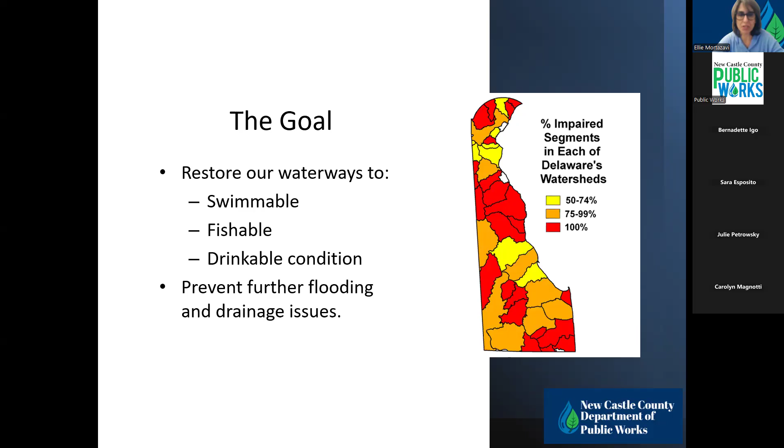As you can see in this picture, the majority of watersheds in the state of Delaware are impaired, some less, some more. And this is definitely our most important goal, to make sure that the red and orange colors become less intense, and hopefully someday they are all going to be in good white condition, as well as prevent further flooding and drainage issues. Not only is that our goal, but at the same time, we have our obligations under state regulations as well as the federal regulations.

New Castle County, we are a delegated agency by DNREC to administer Delaware sediment and stormwater regulations, such as reviewing the plans, construction plans, design plans, as well as the inspections and post-construction inspections for the stormwater management facilities. Also, at the same time, we are obligated under federal rule under the NPDES permit, the last one was issued to us back in 2013, that we are principal permittee with DelDOT, as well as 5 other co-permittees, which are Bellefonte, Elsmere, Newport, Delaware City, and New Castle.

So the NPDES program has 8 measures that we have to make sure that we implement, and we are trying to make sure that they are all effective. Public education, illicit discharge, stormwater during construction, which are all Department of Land Use, post-construction stormwater inspection and maintenance, which is why we are here today for this seminar. We also have good housekeeping for county facilities, as well as industrial stormwater, watershed priority list. We have to do different projects in different watersheds to improve the water quality, as well as mapping.

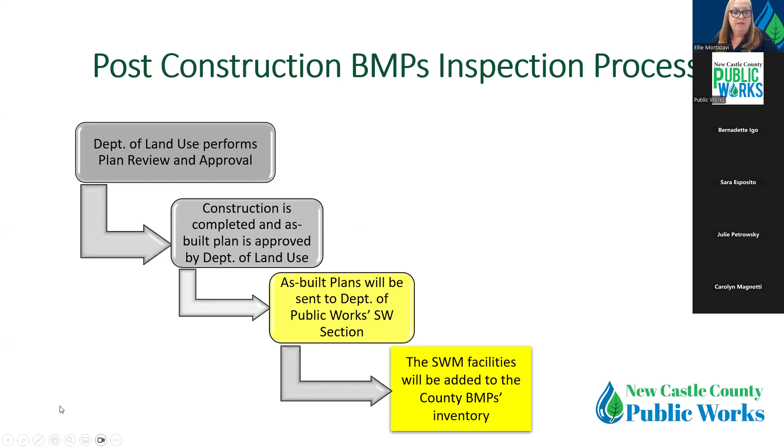So for our 2025 inventory, the total number of BMPs has been up to almost 3,000. We have 2,955. This is a mixture of private BMPs, such as 981 residential and 1,074 commercial industrial sites. Single-lot residential BMPs are exempt and not included in our inventory. All BMPs built pre-1991 are also not included in our inventory. On average, between 80 to 100 best management practices are added to our inventory every year. So we will definitely be over 3,000 facilities for 2026.

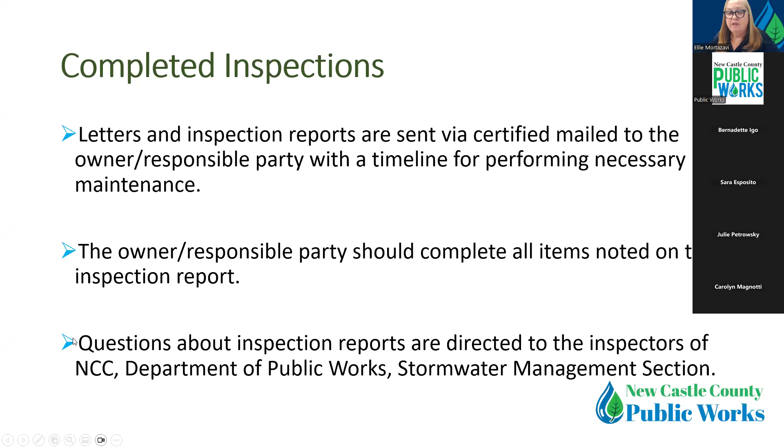So once the inspectors go out and complete the inspections, letters and inspection reports are sent by certified mail or email to the owner or the responsible party with a timeline for performing necessary maintenance. The owner or responsible party should complete all items noted on the inspection report. Questions about your specific inspection are directed to the inspectors in the Department of Public Works Stormwater Management. Julie will go over everything more specifically, but each inspection has the inspector's signature and contact information.

Once you receive the report, we highly suggest and recommend to obtain a copy of the operation and maintenance plan for the stormwater management facility at your site if available. We understand a lot of these facilities are older and sometimes we cannot find the plans, but we'll do our best for you. Also obtain an as-built plan as well as a landscaping plan. And then we recommend to hire a professional contractor who's familiar with this type of work.

Difficult BMPs for inspections, such as inlet inserts, urban sand filters, rain tanks, Stormtech, green roofs, are difficult to be thoroughly inspected by our inspectors because of limited access. Therefore, as the facility's owner, it's their responsibility to have the facility inspected and maintained in accordance with the plan, ensuring that it functions per design.

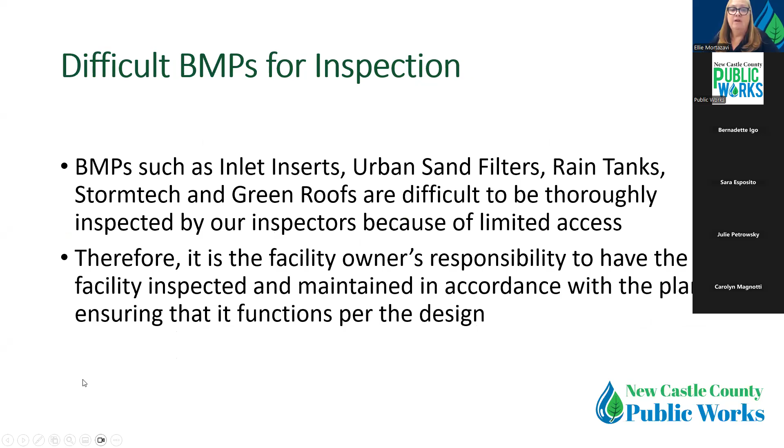We do have a contractors list. We can supply a list of contractors who have done work on similar stormwater facilities. We cannot recommend any specific contractor to you, but we would recommend obtaining 3 to 5 estimates, since they do vary in price and experience from the list we supply.

Oftentimes for sites that are older, we have major repairs that need to be done. An example of a comment for a major repair: the inspection report will notify you if major repairs are needed as directed. It will state something similar to this: repair, replace the deteriorated inlet/outlet pipe and flared end section. TV investigate the length of the inlet pipe to determine the extent of the deterioration. Submit the footage report to New Castle County for review prior to repairing the pipe.

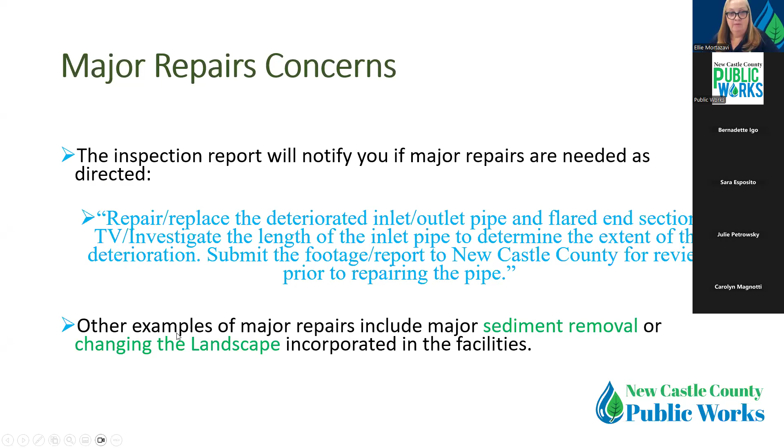Other examples of major repairs include major sediment removal or changing of any landscape incorporated in the facilities. Before performing any major repairs to the existing stormwater management facility at your site, please consult with the New Castle County Department of Public Works for the review and approval process. It must be approved before any work can start. Plans must be reviewed and approved by New Castle County Department of Public Works before you start the project with a hired professional contractor and/or outside engineer.

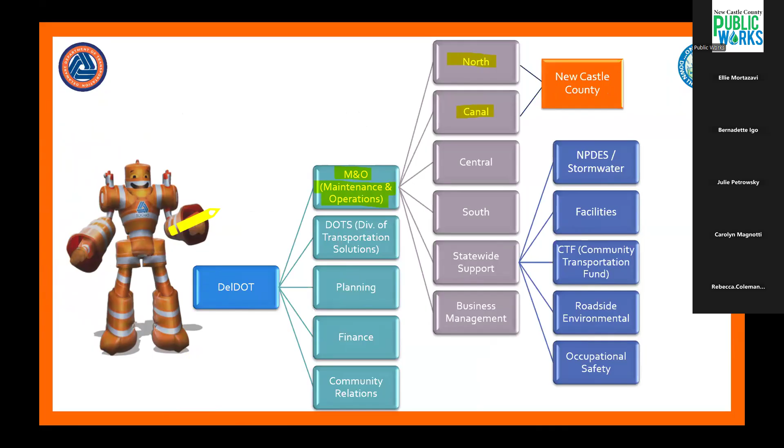So who you're gonna call? Wally, DelDOT's mascot, is gonna help me walk you through who to call within DelDOT. And again, I'm Sara Esposito, the program manager for the NPDES program. All right, so big chart. Wally's gonna walk us through it. Within DelDOT, we have a couple of different divisions. We're gonna start in our Maintenance and Operations division and talk about our North District and Canal District that help maintain New Castle County. There's two other districts, Central and South, that handle the southern part of the state, but we'll focus on North and Canal.

And then also part of M&O is our statewide support services section. Within that, we have the NPDES/Stormwater program, which is my program, as well as the Community Transportation Fund. We'll touch on those, as well as our business management section for the snow reimbursable program. And then we'll switch to other divisions, including our DOTS division, which is the Division of Transportation Solutions, and our Community Relations section.

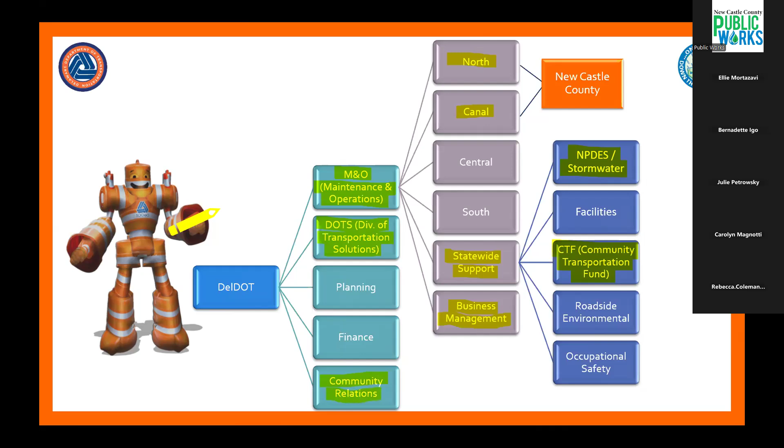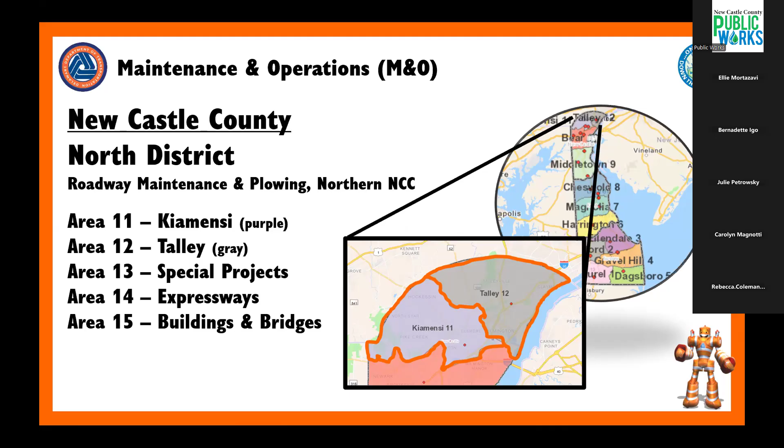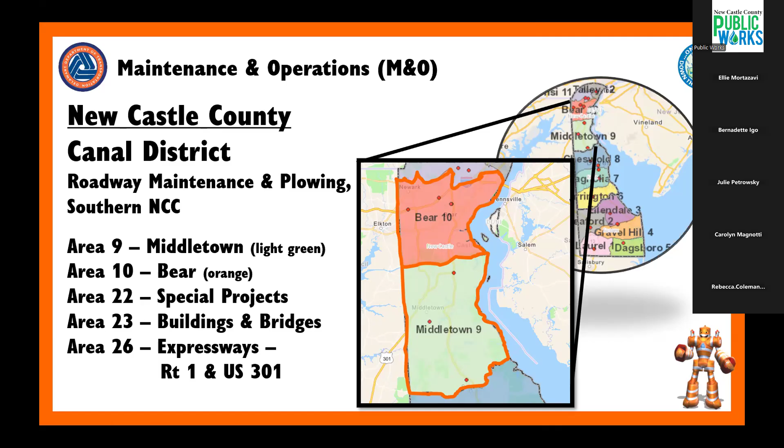All right, so Wally's going to give us our public service announcement number 1. The maintenance yards are not DMVs or permitting offices. I gave you the addresses and the phone numbers, but in actuality, there's really no need for you to visit these locations, or really to call them. And at the very end, I'll be giving you the best number to call to report a problem.

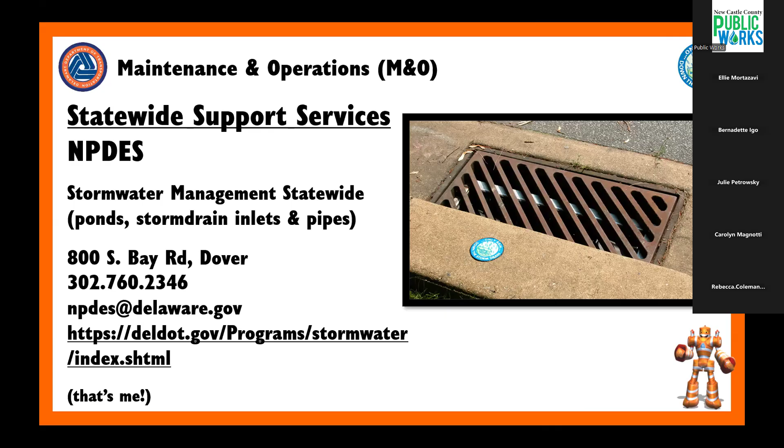Public service announcement number 3 from Wally. Not all storm drain infrastructure is DelDOT's. So DelDOT only maintains storm drain infrastructure that carries roadway runoff to the point of discharge to the end of the closed drainage system. We do not maintain infrastructure upstream of the road, such as backyard runoff that did not originate off another roadway. We do not maintain ditches or streams within subdivisions, as these are downstream of that closed drainage system. And we also do not maintain stormwater ponds within subdivisions, because again, that's at the end of the closed drainage system, and New Castle County helps oversee those, and you'll be getting a lot more information on that today.

Caveat to all that is, unless there's a specific agreement that states otherwise, we do have some shared ponds within subdivisions that treat both DelDOT water and the subdivision water. They're few and far between, but they do exist.

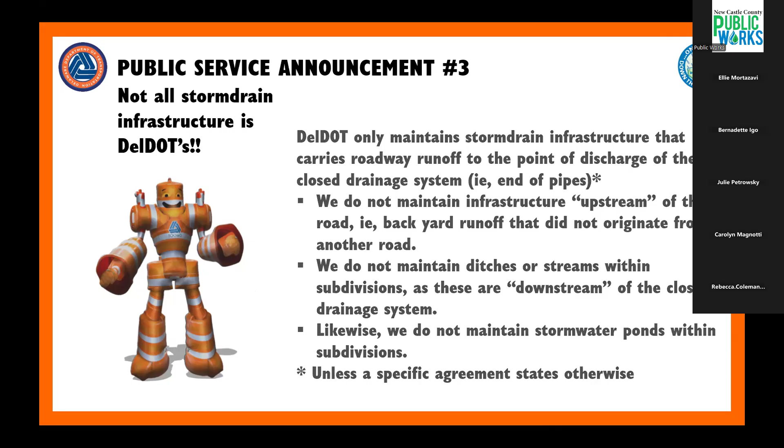So here's a map or a diagram to help explain some of that. If we're looking at this subdivision here, DelDOT maintains subdivision roads, so DelDOT would maintain the storm drain infrastructure that's in the roadway, Nathalie Drive, plus all the other roadways in the community. We would also maintain downstream of the roadway to the point of discharge, as long as that pipe is in a drainage easement and was part of the original subdivision design.

But we would not maintain the open ditch downstream of that discharge. And likewise, we would not maintain upstream of the roadway since those back lot areas do not carry any roadway runoff. And that's true even if that infrastructure was there at the time of the initial subdivision recordation, we would still not maintain that infrastructure because it does not have any roadway runoff associated with it.

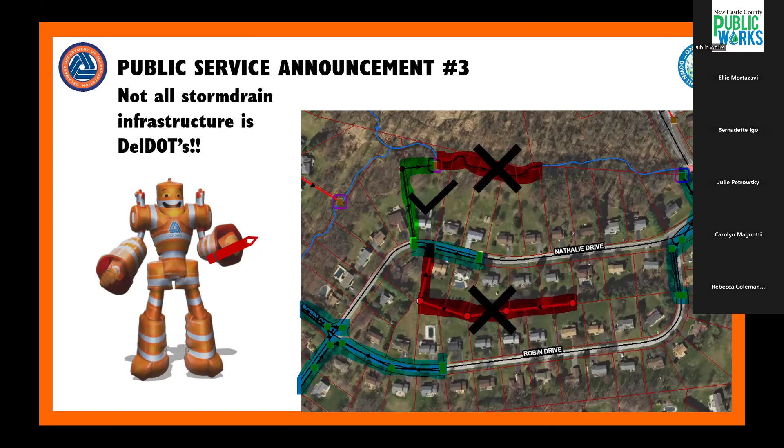All right, back at it. Sticking with the NPDES program, my program, we also help make sure that our water is clean. We check the end of our pipes regularly to make sure that there's no pollution. And then we also educate the public to not dump stuff down the storm drain. And if you see something, you can report it and we'll go out and investigate.

So we provide this hotline, 302-STOP-IT, and the website 302stopit.org in conjunction with New Castle County, so that if you see something, you have an avenue to report it and we'll go out and investigate. If it's not either us or the county's responsibility, we'll help figure out who's, like maybe it's a municipality's, and we'll coordinate with that municipality as well.

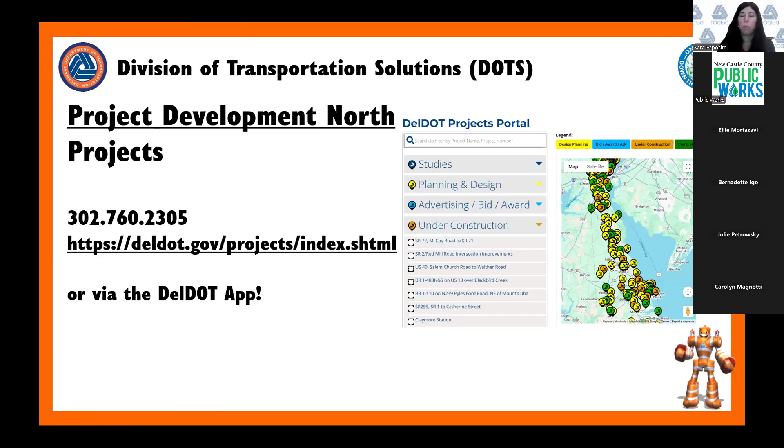So you can check out our DelDOT projects portal website that shows locations and color codes the projects based on whether they're in design or under construction or complete. And you can also do the same thing with the DelDOT app. The app that I showed earlier had an icon for projects and it would pull up a similar looking map. And you can click on one of those projects and bring up a project webpage that gives more information about the projects, including the plans.

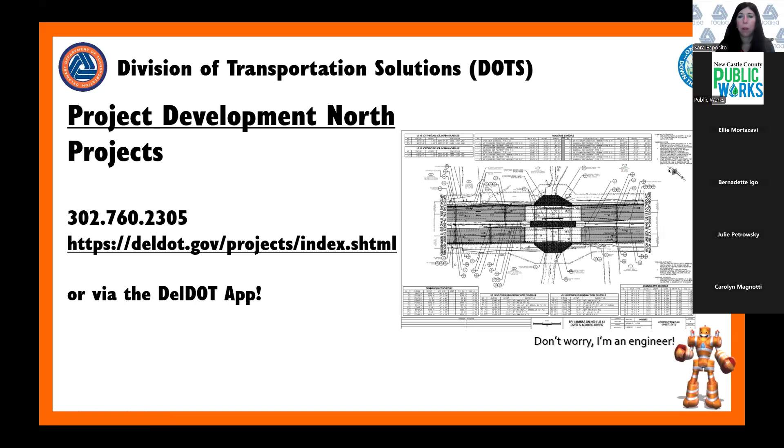And there's a lot of information on the plans. There's usually also public workshop information that shows it more conceptually, kind of toned down a little bit, so it's not quite as in-depth as these black and white engineered plans show.

That best number to call is our Transportation Management Center, or TMC. It's basically our dispatch 24/7 hotline that's staffed to receive any roadway issues and conditions, and dispatch that to the appropriate person or group to handle. So if you're going to store any phone number in your phone, I would recommend this: 302-659-4600, or #77 does the same thing. That sends you to that 24/7 hotline, and you can report a problem and they'll dispatch it.

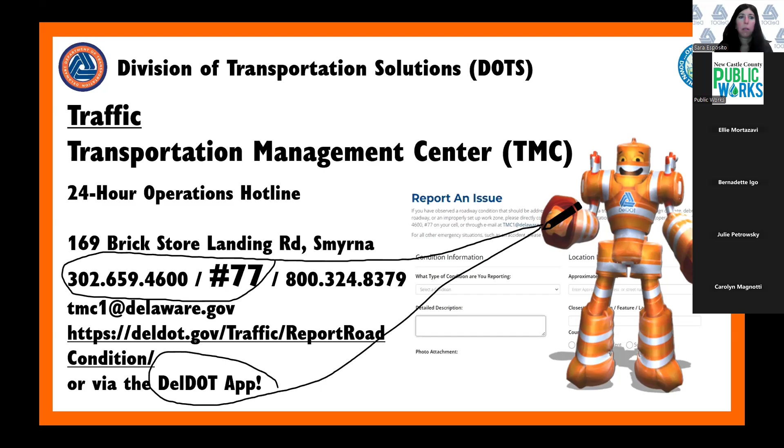So in summary, who are you going to call? TMC. And again, those phone numbers are there. And what are you going to use? The DelDOT app.

And then just real quick, wait, there's more. Just to put a couple plugs in for our Delaware Livable Lawns program that we in the county help sponsor. You can get a free soil test kit to test your soil and know whether you need fertilizer and the amount of fertilizer you might need. Or you can also find out about a certified Livable Lawns company that can come out and do the soil test for you, and then also provide your lawn maintenance needs.

So you can check out the Delaware Livable Lawns website to either go the DIY route and get your free soil test kit and use those recommendations to fertilize your lawn yourself, or you can find a certified commercial business that would handle that for you. And lots of literature on the website. Most of it boils down to doing that soil test in the spring and then fertilize based on those recommendations in the fall. Fall is really the best time to put fertilizer down.

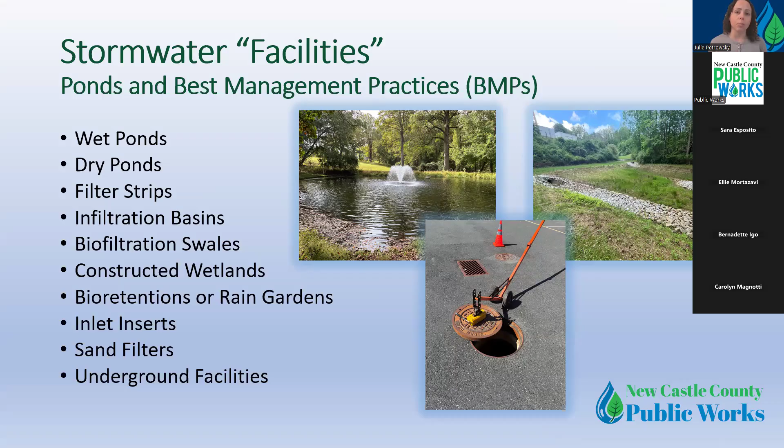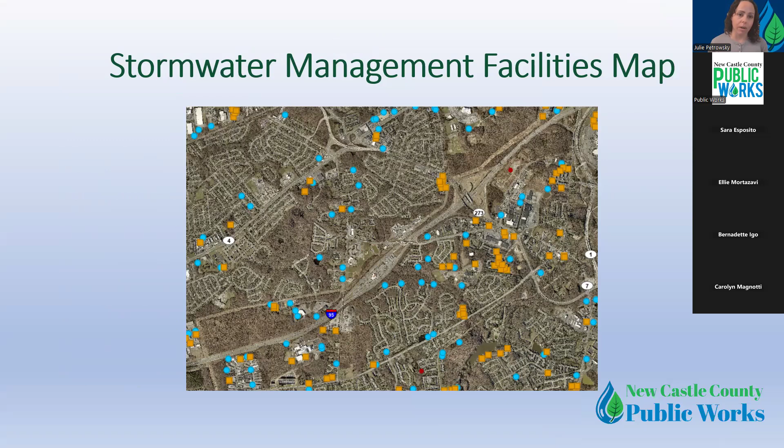Our stormwater management facilities are noted on our GIS map. Our facilities are grouped together by location, and each year our stormwater inspectors are assigned to inspect facilities within a certain group or area. If you ever have trouble locating the facilities at your site, please feel free to reach out to us, and we can email you a map screenshot showing where everything's located.

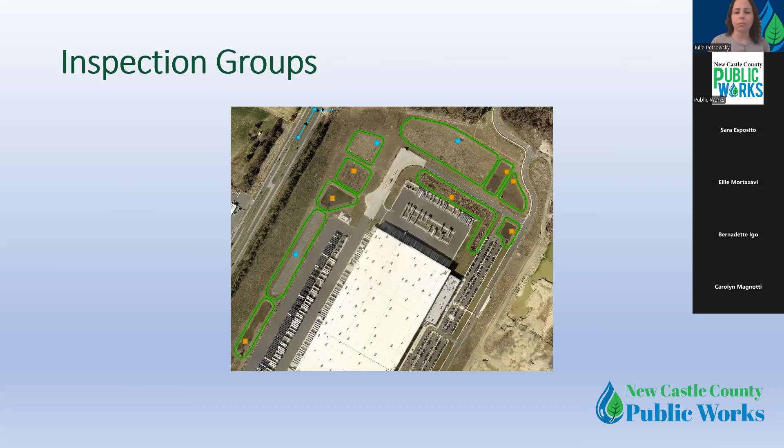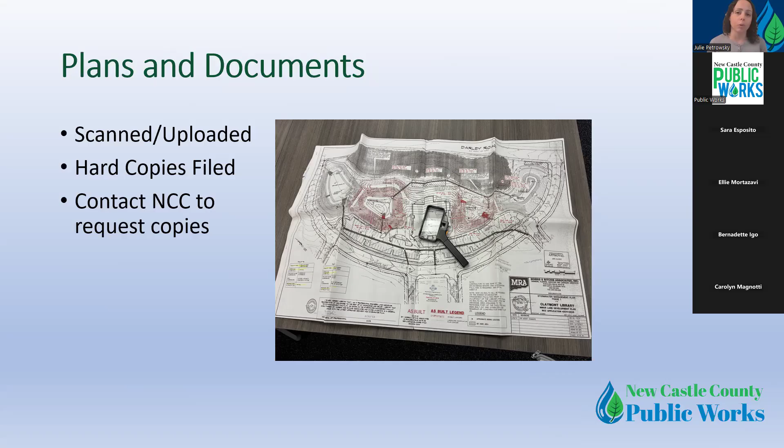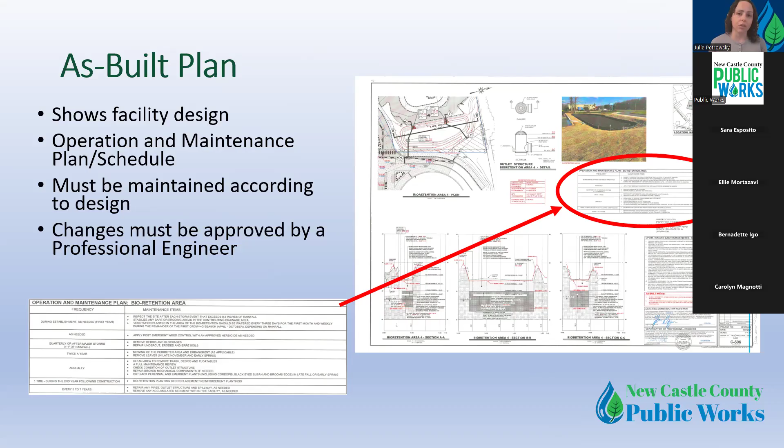The as-built plan shows the design details and gives instructions on how the facility should be maintained. There's usually a section on the as-built plan noted as the operation and maintenance plan that tells you what kind of maintenance should be performed and how often. Per New Castle County Code, all stormwater facilities must be maintained according to the plans, and you cannot make any changes or alterations to the facility because they're supposed to match the approved design plans. So if you want to make any changes at all, you would need to hire a professional engineer to red mark the existing as-built plan and then submit that to my office for review. If we do approve the red mark plan, then you would be permitted to proceed with those changes, but you must receive our approval first.

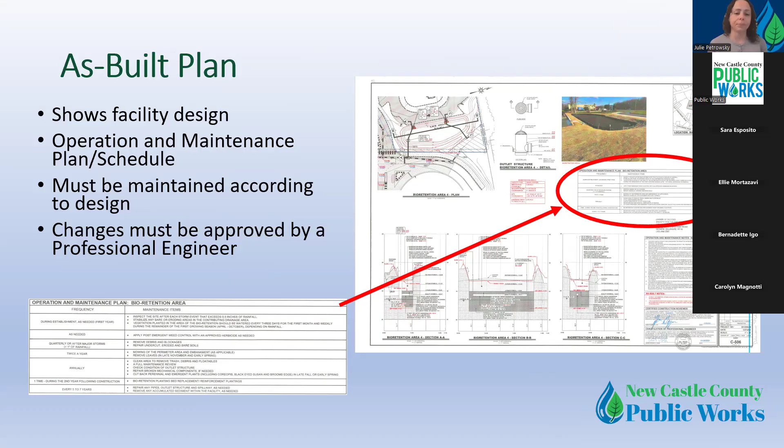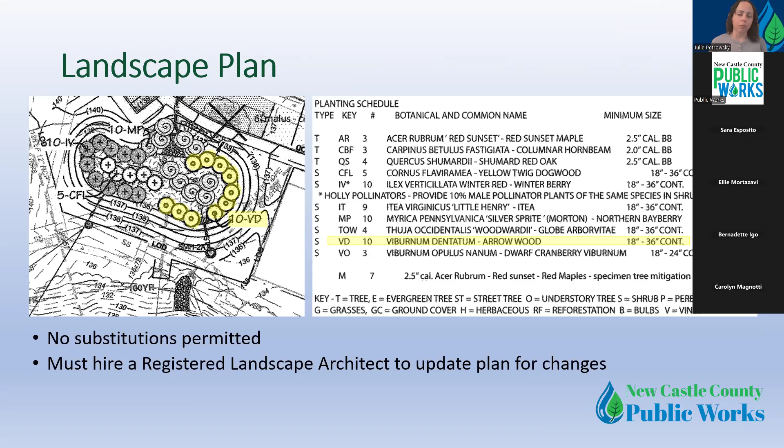And unfortunately, again, per New Castle County Code, all plantings must be installed as shown on the approved plan, so no substitutions or changes are permitted. If you do need to make any substitutions or changes, you would need to hire a registered landscape architect to red mark that landscape plan and submit that to my office for review and approval prior to making the changes.

We use a program called CityWorks for our asset management software. Through CityWorks, each facility in our inventory and each inspection report that's generated for the facilities are tracked. So each facility is assigned a unique 5-digit ID number. All ponds begin with the number 1 and all BMPs begin with the number 2.

We inspect all our stormwater facilities at least once per year, and we follow up by sending an annual inspection report based on that inspection to the site's owner. Sometimes we will send a courtesy copy to the site tenant if there's a different tenant versus owner, but ultimately the maintenance is the responsibility of the owner of the site. So if you have a maintenance agreement with a tenant or another party, it is up to the owner to make sure that everything's followed up on.

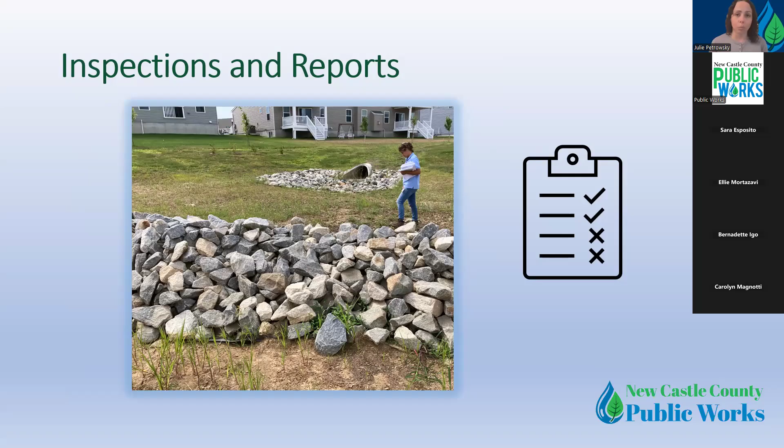Getting into our actual inspections. During our annual inspections, we go over our checklist and each line item that is noted on the inspection reports. The first thing we look for is access. There should be a 10-foot wide access path maintained to and around the facility and each structural component at all times. That way we can access everything, see what we need to see in order to complete thorough inspections.

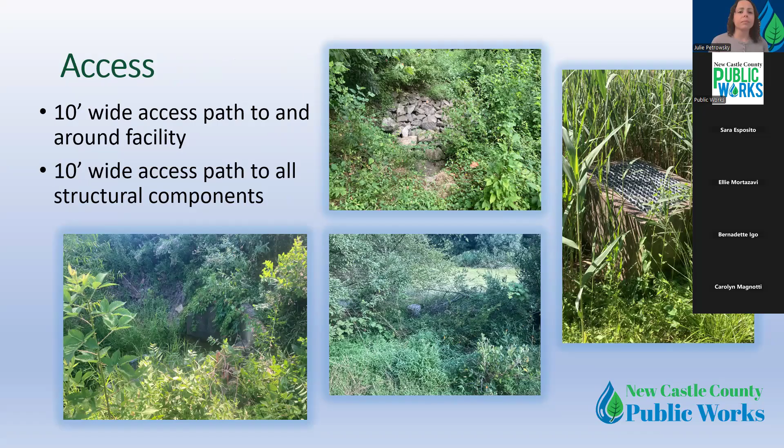We also assess the condition of each structure. We look for signs of rusting or corrosion, any cracks or spalling, or any evidence that the structures may be in failure. And we will recommend repair as necessary. If your facility does require repairs, please reach out to us ahead of time and submit those repair proposals to us to get our approval prior to completing the repairs, because we need to make sure that what you're proposing is acceptable by New Castle County standards and that it matches the approved design.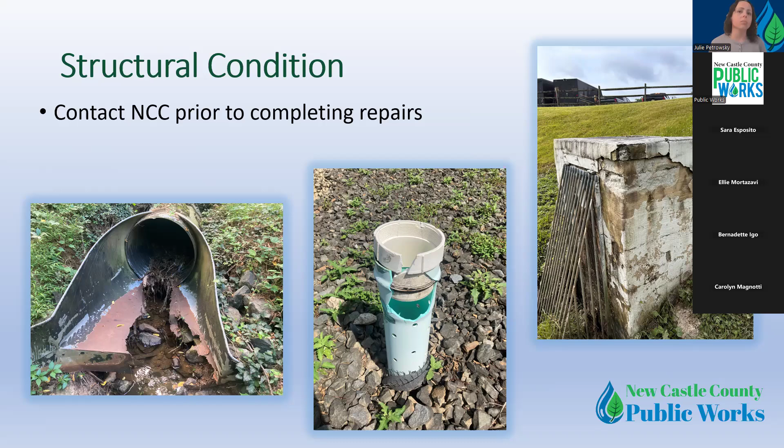We would really hate to tell you that the repairs are not acceptable and that you have to do it over. That is not a fun conversation for you or for us. So please be sure to reach out ahead of time and make sure that you get that approval from us prior to completing repairs.

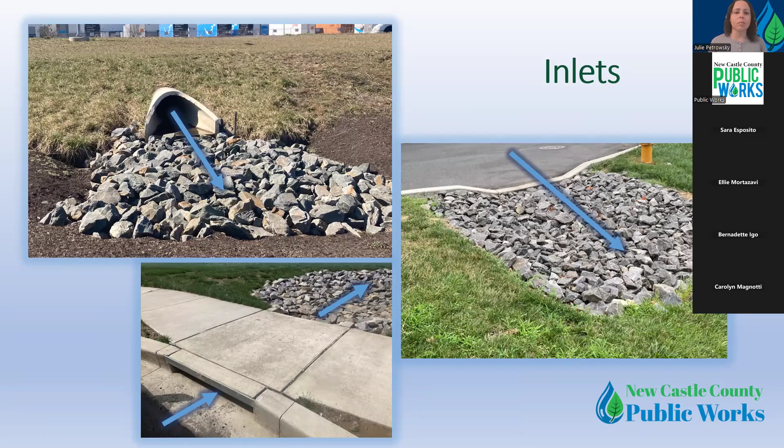The inlet structures are where water enters into the stormwater facility. They can be pipes or depressions or cuts in the curb. A lot of the time, there will be a riprap lined forebay or a rock lined apron area. That area is designed to collect sediment and debris as it washes in with the stormwater and to slow down the flow of water and prevent erosion. And those areas just need to be cleaned out during routine maintenance.

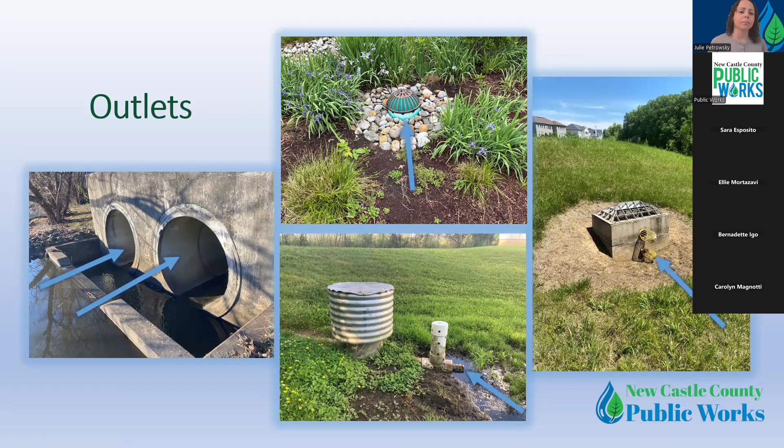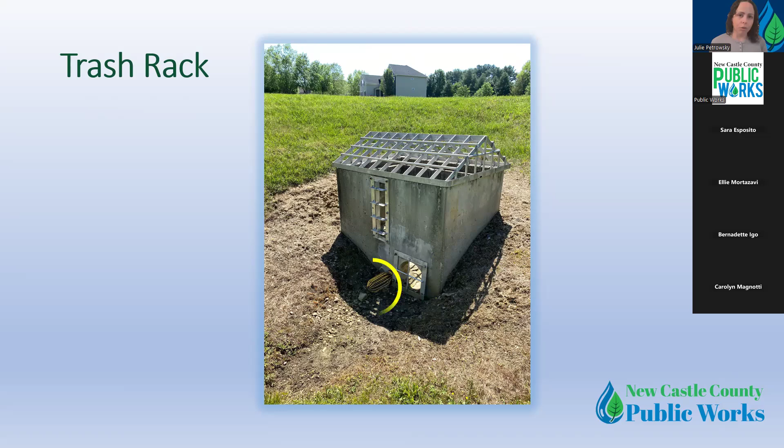The outlet is where the water exits out of the facility, so inlet in, outlet out. The outlet structure can be a variety of different types of pipes or risers. A lot of the time, there will be a trash rack on the outlet. The term trash rack refers to a device, usually a type of bar or grate, that's designed to prevent debris from washing into the structure. So you can see in this example, the outlet structure in this photo, there are quite a few trash racks on there. So when we note to remove the minor debris from the trash racks, this is what we're referring to.

The low flow structure is a device on or connecting to the outlet structure where the lowest level of stormwater flows out of the facility. It can be an orifice or an elbow fitting or a weir. These devices do need to be cleaned out on a routine basis. If the water level in your pond tends to be high for an extended period of time, then most likely the low flow is blocked, and you should have your contractor look into that to make sure they free that blockage. If the low flow does remain blocked for an extended period of time, that can put extra stress on the structure, and that can sometimes lead to structural failure. So this is an important item that you need to make sure your contractors are following up on.

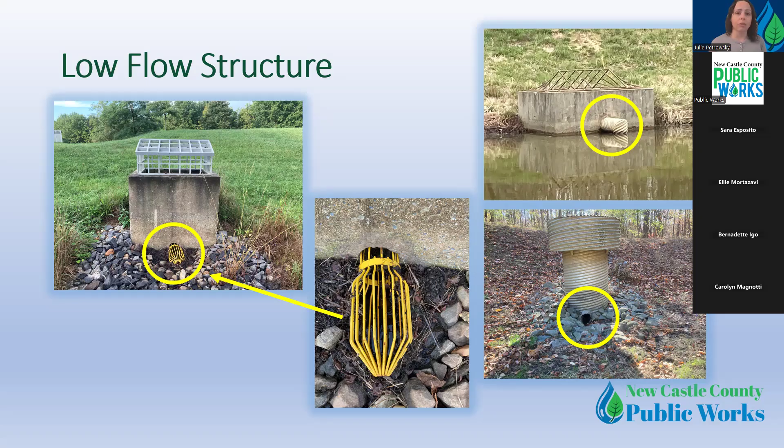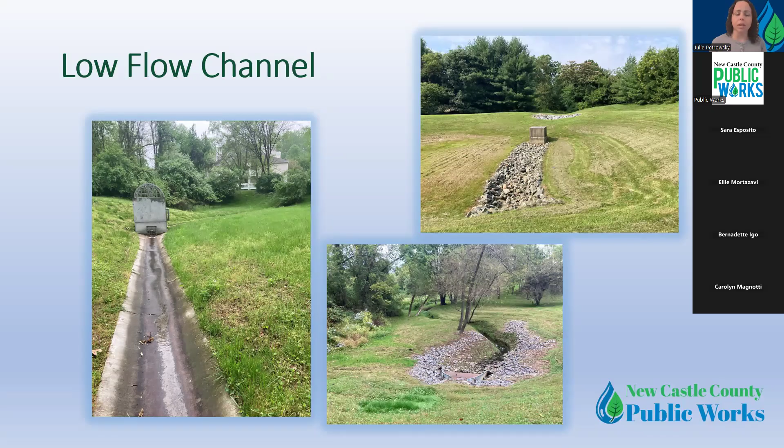The low flow channel, just as it sounds, is a channel that carries the lowest level of stormwater directly to the outlet structure. Low flow channels are usually lined with concrete or stone, but sometimes they can be more natural and grassed, like an inline pond, which resembles a small creek or stream. The low flow channels just need to have minor sediment, weeds, and debris removed from them on a regular basis to prevent blockages and encourage a positive flow.

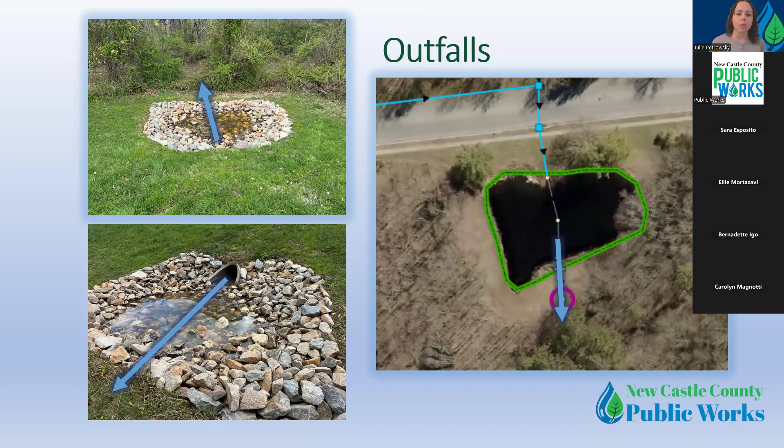The outfall structure: we mentioned that inlets carry water in and outlets are where the water exits out. The outfall is the final discharge point of the facility or the area in which your facility drains to. And like the other structures, these areas just need to have access maintained to them and have minor sediment, weeds, and debris removed from them on a regular basis.

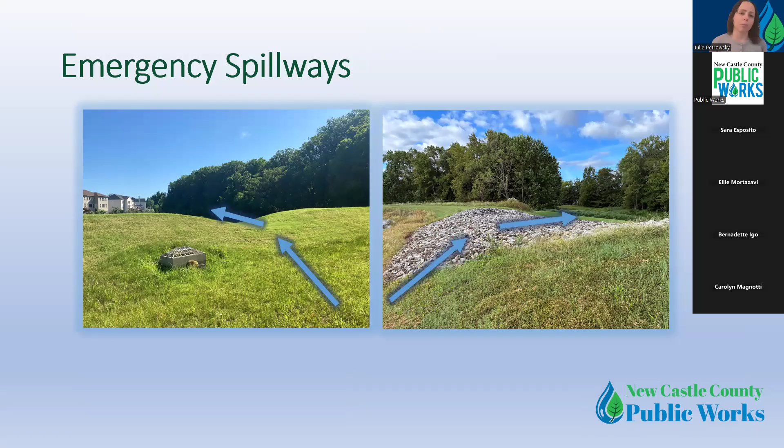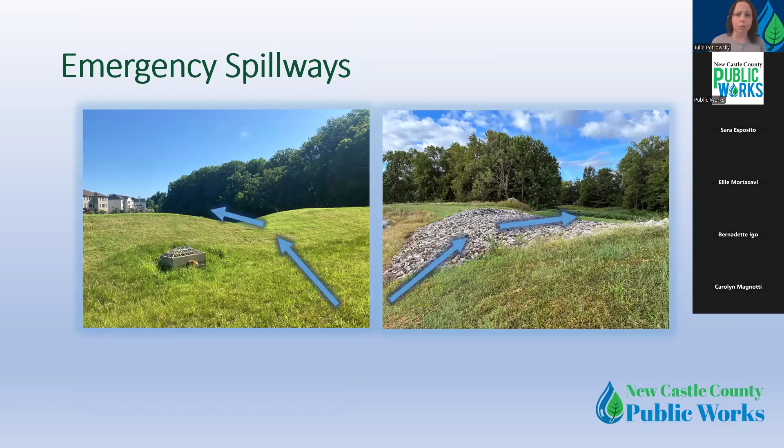An emergency spillway is a low area on the side slope of your facility. They're designed so that if we have a severe storm and your stormwater facility completely fills up and tops over the outlet structure, that excess stormwater will flow over through that low area. Sometimes they're lined with rocks or riprap, as you see in the photo on the right. Sometimes they're just grassed, as in the photo on the left. During our inspections, we will check for signs of erosion or bare areas, and we will note to remove minor sediment, weeds, and debris as necessary.

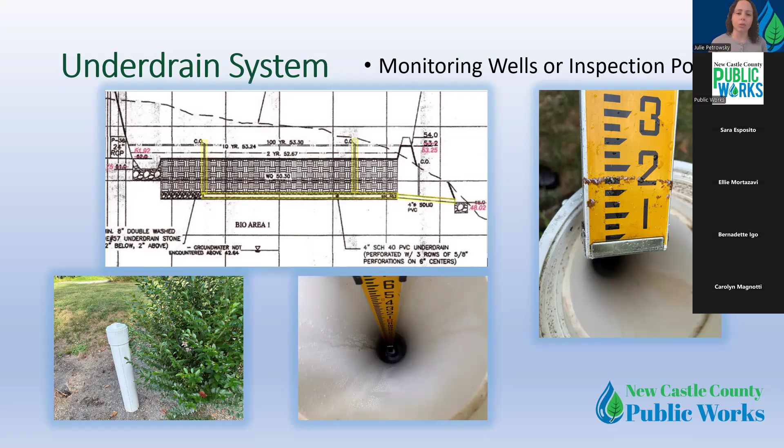If you have an underdrain system in your facility, there will be a small pipe that runs horizontally below the surface. These systems help to either infiltrate stormwater into the ground, or sometimes they will drain to an outfall area. There will be monitoring wells or inspection ports. That's the plastic stick-up pipes that we use to look into the underdrain system to make sure that it's functioning properly. So we will open the caps to those plastic pipes and look inside. Sometimes we will insert a measuring stick to determine if there's standing water or sediment building up inside. And if there is, then the facilities may need to be flushed or cleaned out at that time to eliminate any blockages.

Mowers, be careful. If you do have monitoring wells at your facility, especially if it's in a grassed area like within a bioswale, please make sure your mowers are aware of their locations and that they're careful to not crash into them and break them while mowing. Unfortunately, it's a problem that we see pretty often. If your mowers do break the monitoring wells at your site, the owner will be responsible to have them repaired or replaced. So please make sure you hire a competent contractor and provide them with copies of the approved plans so that they can see where these structures are located.

We look for signs of animal burrows. Any holes or burrows we will note to fill in and compact and remove any resulting sediment and stabilize the area. I know some animals can be persistent, and repairing the burrows can be a continuous battle. But it is an important part of maintenance to make sure that the facilities are in good condition and that they function as designed.

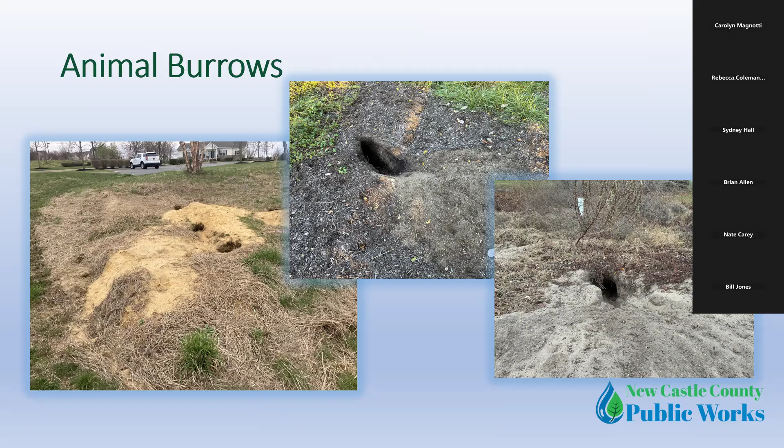We look for signs of erosion. Some erosion can simply be caused by stormwater runoff just running over the ground. Sometimes when we have a lot of rain, that can happen and it just needs to be repaired as it happens. Sometimes erosion can point to bigger issues such as structural failure, and we may need to look into that further and recommend repairs.

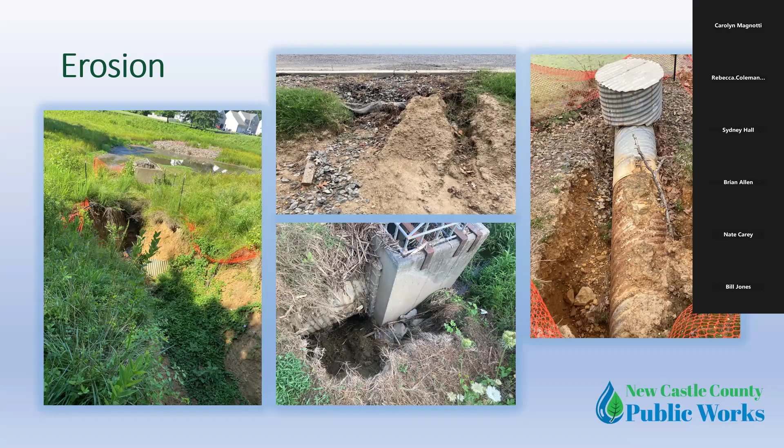I want to take a moment to emphasize that plastic netting is no longer permitted in the state of Delaware to be used for stabilization. It's a hazard to wildlife. Birds and snakes and other wildlife frequently get caught in it. And if you do have it used on your site, you will be required to have it removed and done over with the appropriate biodegradable matting. All contractors should be aware of this requirement, but unfortunately, we still see it being used a lot. So please make sure that your contractors are using the correct stuff.

One of the most common things that you'll see noted in your inspection reports is sediment removal. It's normal for sediment to wash into your stormwater facility with the stormwater runoff, and it just needs to be removed on a regular basis. So we will usually note remove the minor sediment, vegetation, and debris, because when there's one, there's usually the others, especially in these rock areas or these riprap lined forebay areas.

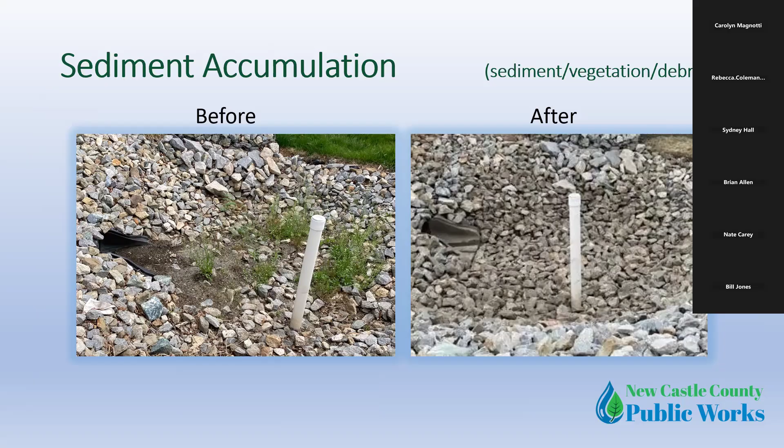So the photos in this example are an inlet structure and riprap lined forebay area before and after cleaning. The contractors will typically move the rocks, shovel out the sediment, weeds, and debris, and then replace the clean rocks back into the forebay area. So that after picture is the end result that we're looking for with the clean rocks. There are usually types of geotextile fabric underneath the rocks in forebays like this one. So your contractor will need to be careful not to damage that while performing maintenance.

We went over the landscape plan earlier in this presentation. We check the facilities with required vegetation, make sure that the vegetation is being maintained according to the plans, that all plants are in place, that the grass is being maintained at the correct height. So make sure your contractors have a copy of the landscape plan so they understand what needs to be done with the vegetation.

We also look for signs of unwanted vegetation, weeds or invasive vegetation, woody vegetation, young trees. These all need to be treated with an appropriate herbicide and then cut and removed from the site. This is something that should be kept up with on a routine basis. Weeds, especially invasive weeds, they can get out of control pretty easily. And when they become really dense, they can get pretty expensive to take care of. And it's really difficult to get them back under control again. So please make sure that your contractors are following up with the routine weed removal.

In Delaware, it is required to have a special license to apply aquatic herbicides. So if you see that noted in your report, make sure you hire a contractor who is able to take care of that. We do get a lot of questions about herbicides and how safe they are to use, how safe are they for the natural environment. But as long as they're used appropriately and according to the manufacturer's specifications, they are deemed as safe. So if you have any specific questions about the types of herbicides to use for the weeds you may be experiencing at your facility, I recommend that you reach out to a contractor who has their aquatic herbicide license.

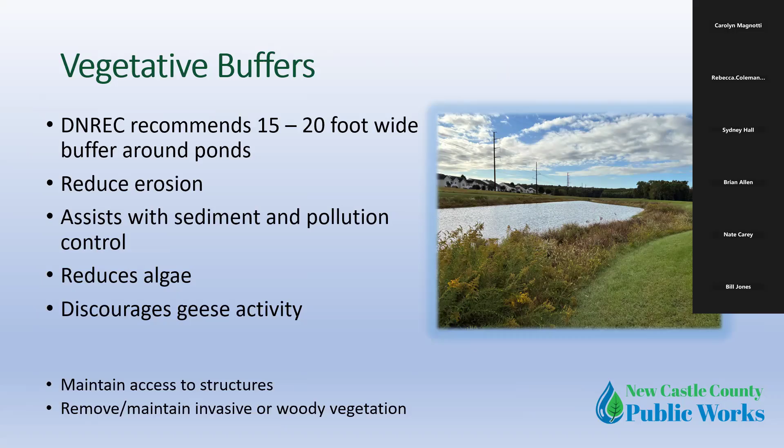Getting into the different types of stormwater facilities that you'll commonly see in New Castle County. Wet ponds or retention basins are ponds that have a permanent level of water in them at all times. The as-built plans for your facility will tell you what the normal level is for the water to be at. If the water level is too high or too low for an extended period of time, then most likely there's some type of blockage or a leak, something that we need to look into further. Make sure you're cleaning out the low flow structure on your outlet on a routine basis, and that will help keep the water level at the normal level.

Dry ponds or detention basins are basins that are designed to fill up with stormwater during the rain, and they release the water slowly. They should be completely drained within 48 hours after the rain has stopped. Again, make sure you're checking your low flow devices to make sure that the water can drain properly. It is fine to let the grass vegetation within these basins grow a little taller, as long as access is maintained to each structure in the facility, and as long as the facility is maintained to be free of invasive and woody vegetation.

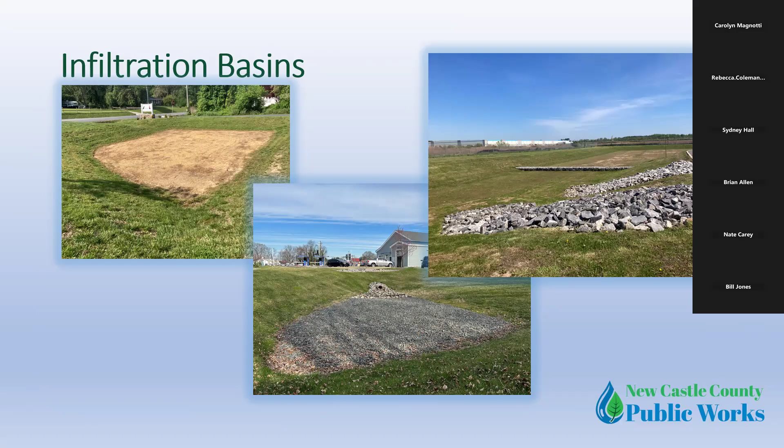Biofiltration swales are essentially drainage ditches that are lined with specific types of grass and herbaceous vegetation. Usually there will be height requirements within bioswales. It is important to let the grass or vegetation grow taller in these areas to slow down the flow of water and prevent erosion and also assist with infiltration. Specific height requirements will be noted on your approved landscape plan.

Please make sure your mowers and your hired contractors are aware of the height requirements and the boundaries of these stormwater management areas. A problem that we commonly see is that mowers will mow the surrounding areas short, and they want to keep going right through the stormwater management areas and mow them flush with everything else. So please make sure your mowers and contractors are aware of the boundaries of those areas. Some people will opt to install signs as a reminder, but ultimately it is up to the property owner to make sure that your hired contractors are following the rules with those areas.

Grass filter strips will usually have a height requirement, a lot like bioswales. They usually should be maintained at 6 inches or taller, but specific height requirements will be listed on your approved plans. Filter strips are designed as an initial treatment. They receive that first flush of stormwater that runs off of a paved surface. They're designed to slow down and spread out that flow of water. Sometimes there will be a stone level spreader or stone diaphragm that's designed to help trap sediment and debris as it washes off of the paved surface. And those areas just need to be cleaned out on a routine basis, just like with the forebay areas.

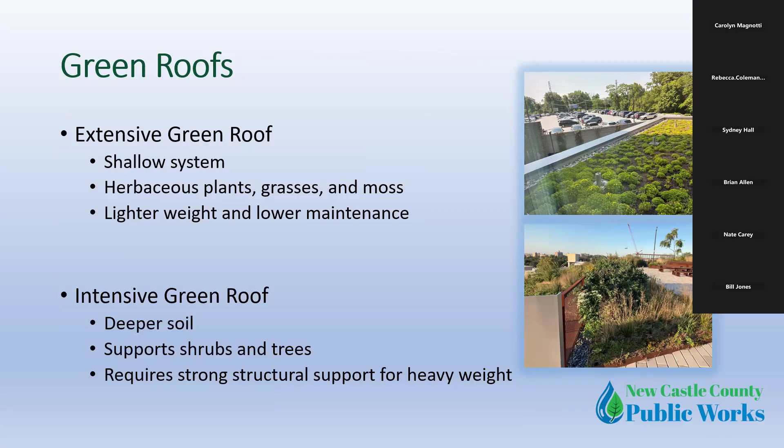Porous pavement and permeable pavers allow stormwater to drain through them instead of running off as with normal asphalt or pavement. There usually will be an inspection port that leads to an underdrain system. We will check those ports and the surface for sediment buildup during our inspections. We also check for signs of oil or petroleum products, any trash or debris, and general wear and tear of the surface. Specific maintenance instructions, including how to clean and how often, will be noted on the approved plans.

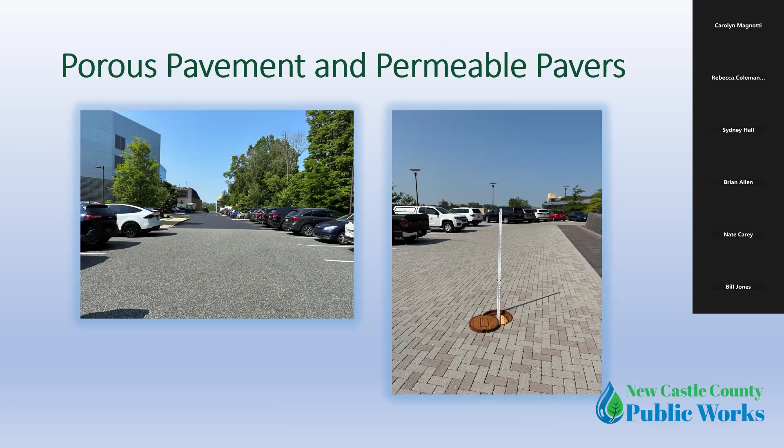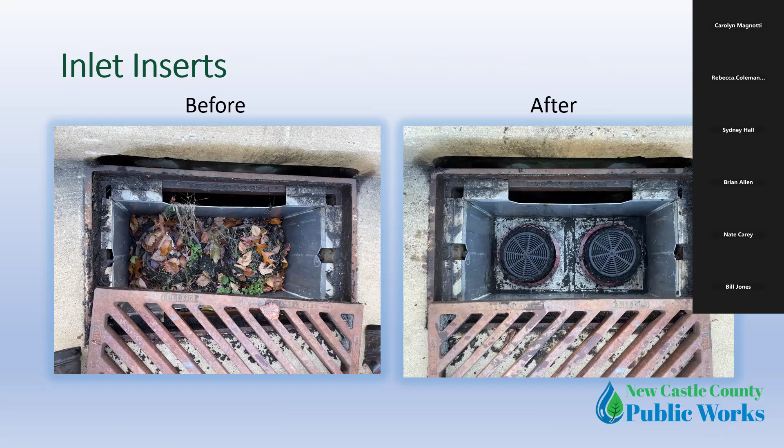Typical modular sand filters are usually found in parking lots. There will be two sides of chambers. Water chambers or wet chambers, that's the side with the slotted grates for water to flow into, and the sand chambers are the side with the solid grate. So water flows into the water chambers, fills up, and then flows through weir openings on the inside into the sand chambers. And water then filters through the sand and drains through a pipe installed along the bottom.

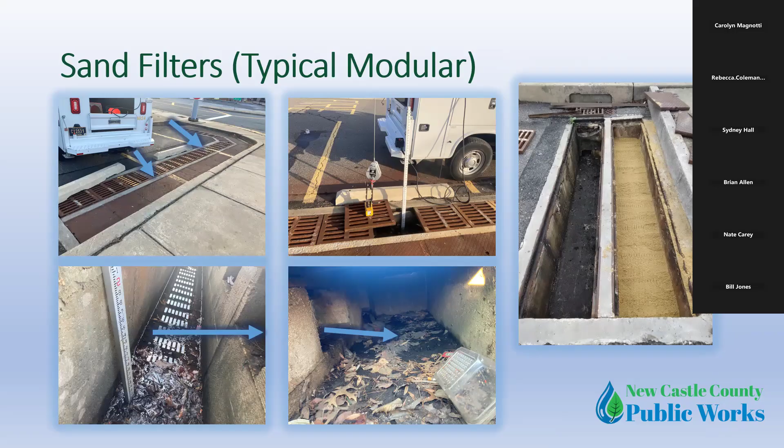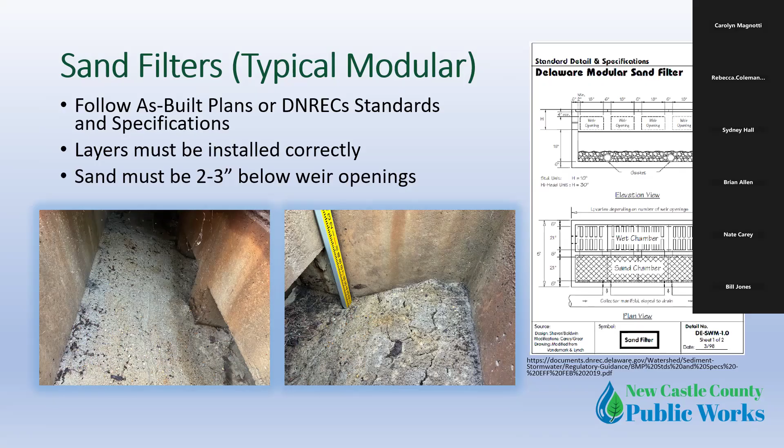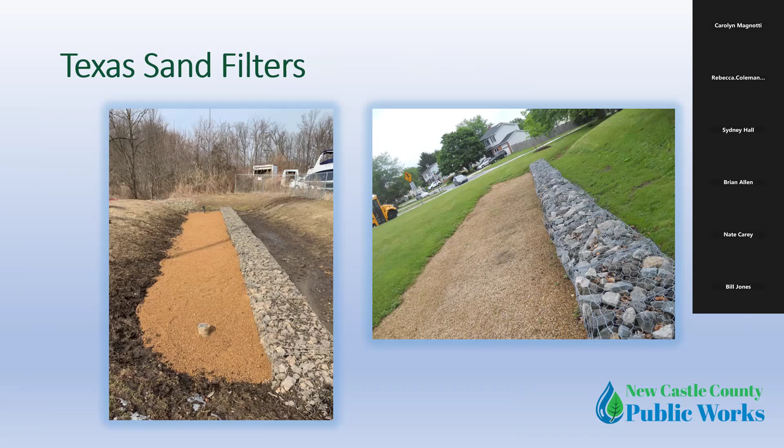Texas sand filters are above ground basins that will have sand or gravel media on one half, and there will be a grass or natural area on the other half, usually separated by a gabion wall or a rock dam. They function similar to the modular sand filters. They're just above the ground. Please refer to the approved plans for your site for specific maintenance instructions.

Underground facilities are a type of storage tank or chambers underneath of the ground. They're usually found in parking lots, but sometimes they can be in a grassed area as well. During our inspections, there will be manholes or inspection ports that we open to check for sediment buildup.

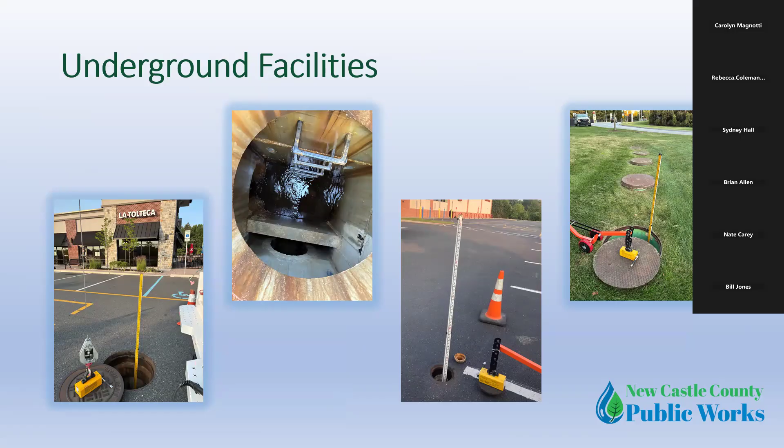Because of how these facilities are installed and designed, it's not possible for us to inspect every aspect of the facility during our annual inspections. Bernadette briefly touched on this during her presentation. Because of that, we do require for special inspection and maintenance logs to be submitted for these facilities, and Carolyn Magnotti will explain that more in depth during her portion of our presentation.

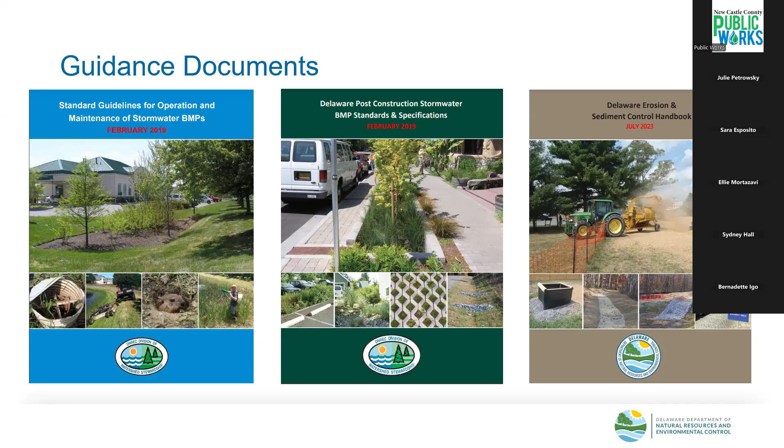Soil stabilization practices will often be required as part of BMP maintenance, so that is also discussed in the course. And participants are encouraged to explore the additional resources provided throughout the course. So what's exactly covered? We provide real examples of operation and maintenance plans used in Delaware with specific callouts for participants to understand what they may be looking for on site. The course highlights the importance of vegetation, covers how to review BMPs, and how to complete inspections.

So the course concentrates on more common best management practices, diving into the specifics for bioretention, sheet flow, bioswales, wet and dry ponds, infiltration practices, and underground systems. And for each BMP, the course covers a maintenance overview, criteria and frequency, and the checklist. A brief high-level overview is provided for BMPs on the right side of the screen that you will not encounter on site as often, such as vegetated roofs, rainwater harvesting, or constructed wetlands.

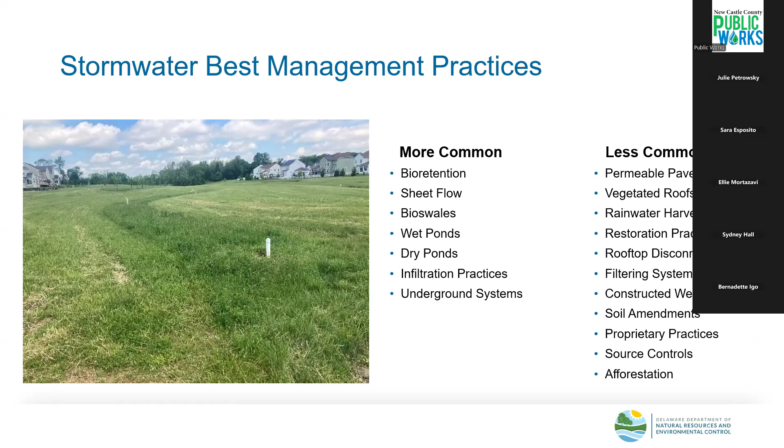Oftentimes, BMP maintenance is not a financial priority and doesn't occur annually as it should. The course offers two interactive scenarios for a routine maintenance example and a non-routine maintenance example. This course provides insight to different levels of BMP maintenance you might encounter on site and how to address the issues you'll find. So some BMPs you see will require plan submittals and full corrective action. The long-term goal of conducting annual maintenance is to avoid situations like these.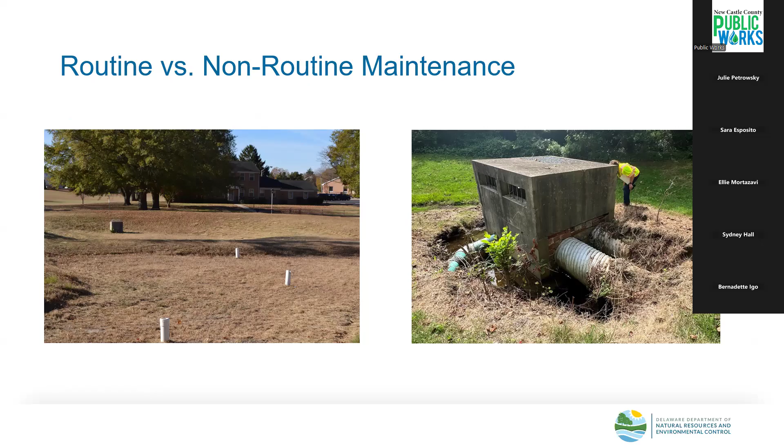So once you're in the course, you can access additional resources like I mentioned, including a job aid. The job aid is meant to provide on-site maintenance guidance for more common BMPs. So reminders to stabilize, manage vegetation, remove sedimentation, when to contact DNREC or delegate agency, and more. This is also available on our training and certification webpage in English, but we also offer it in Spanish within the Spanish version of the course. This is meant to be downloaded, printed, or viewed on a mobile device to be used in the field if you need a reminder.

So as we just discussed, there are certain scenarios that can't be remediated with the maintenance team. So for any non-routine maintenance activities, the delegated agency or DNREC must be informed before any action is taken. The program continues to delegate implementation authority to 8 state and local plan approval agencies. DelDOT handles all transportation construction projects. All other state and federal projects, as well as remediation projects without development, are overseen by DNREC. For example, our program oversees schools, state parks, police, public health, and any other state-run facilities for their projects.

New Castle County Department of Land Use oversees all unincorporated areas of the county compared to New Castle Conservation District, which has jurisdiction over incorporated areas other than Newark, Middletown, and Wilmington; they all have their own agencies. Kent Conservation District oversees Kent County, and Sussex Conservation District has jurisdiction over Sussex. But please be aware that depending on where you're working, the delegate agency will vary.

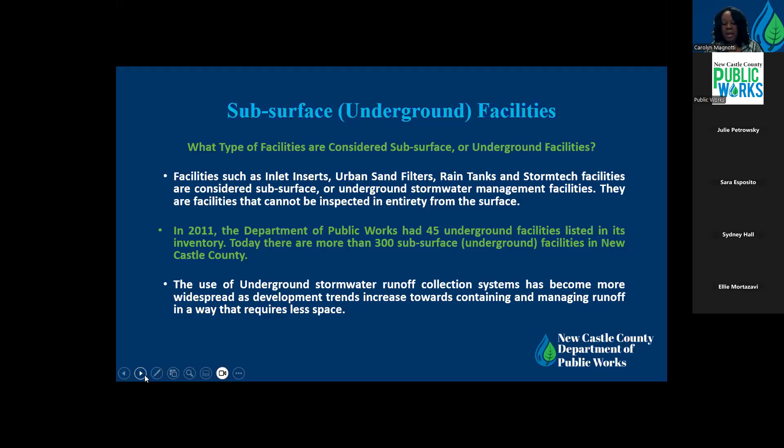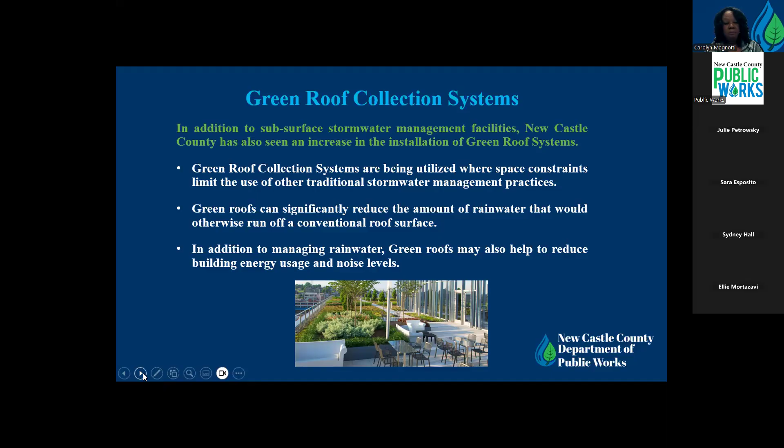Underground and green roof facilities are to be maintained in accordance with your manufacturer or design engineer's recommendations. The maintenance recommendations, you've heard this term a few times now, operations and maintenance plan. It's either going to be on your as-built, or there might be a separate document. Somewhere you're going to have a specific plan for how you're supposed to maintain that facility. The schedule will be noted again on either the as-built plan or in a separate document. Following the maintenance plan and schedule ensures that your facility is in good order and functioning per the design.

Proper stormwater management assists with prevention of area flooding, and therefore ensuring that the facility is being inspected and maintained according to plan is in everyone's best interest, right? And due to limited access, New Castle County is unable to inspect underground facilities to the extent that's listed on your operations and maintenance plan. So therefore, we recommend that you hire a specialist, someone who is educated, trained, and has experience in working with these particular types of facilities.

And should these facilities require entry, you have to go according to your OSHA regulations and use confined space entry. Those rules have to be adhered to. Keep in mind that we ask that a minimum of 2 to 4 inspections, or the number as listed on your operations and maintenance plans, be performed each year.

To ensure that underground and green roof facilities are being properly inspected and maintained, New Castle County has particular ordinances. Those ordinances state that a log, which is obtainable from the department, is to be maintained and submitted once a year with at least 2 inspections, or again, the number that's mentioned on your particular operation and maintenance plan.